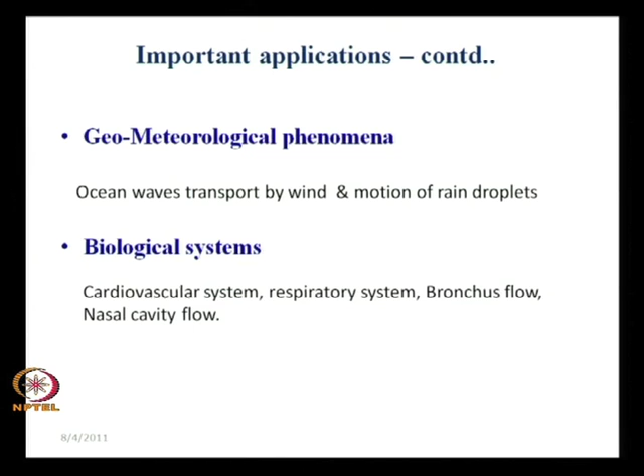But if we have to give a unified approach to this particular type of study, then what we have to do is present some unifying principles. The first thing we have to identify, as I discussed in the last class, is how multiphase flow is different from single phase flow.

Now we found that in single phase flow the situation was either laminar or turbulent. We have to find out whether it is laminar or turbulent, which is already a very well defined technique - once we know it, there is no problem at all. In this particular case also, we have to know the distribution of the two phases.

When you simply pour water from a bottle, through a narrow necked bottle, we find that as the water comes out, large elongated bubbles enter. Definitely the geometry, the topology of these bubbles are different from the spherical bubbles encountered in the previous case. So the same physics, the same governing forces cannot be governing the rise of spherical bubbles - certain forces are more important in one case, certain forces are more important in the other.

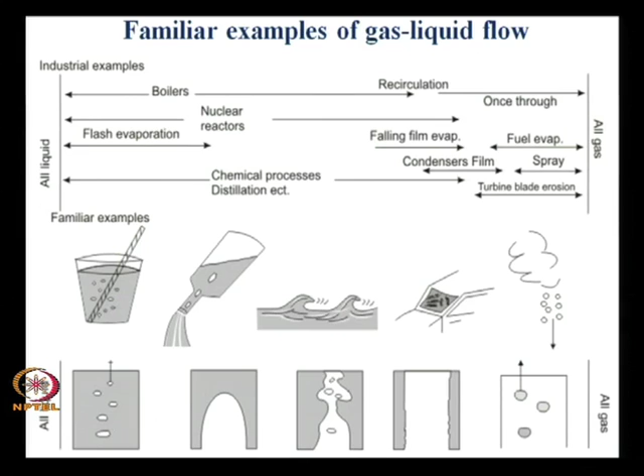So before we go to do anything for multiphase flow - or more specifically, two phase flow situations first, and after that we might touch upon some three phase flow situations as well - the first thing we need to know is the distribution of the two phases. This governs the entire physics of the flow, and more importantly, since the two phases have different densities, as I have already told you...

There is a slip between the phases, as explained in the previous class. The lighter phase tends to slip past the heavier phase, and this slip velocity depends upon the distribution of the two phases, and it varies with a large number of parameters as discussed earlier. Since it governs the slip, it governs heat, mass, and reaction kinetics - it governs everything in two phase flow. The first thing to study is the distribution of the two phases, and how this distribution varies.

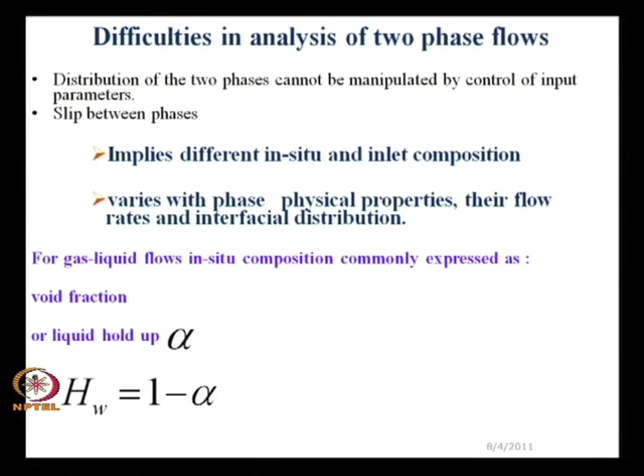Say air and water - what are the different types of flow patterns available? Instead of air, if we use oil, how do the flow patterns change, how do they change with flow rate, and how do they change with conduit orientation and conduit geometry. We will proceed systematically, and today we start the estimation of flow patterns.

From whatever we have discussed, it might appear that there can be innumerable flow patterns with no control over them - we cannot predict them ad hoc, and the situation seems extremely difficult. Well, there are certain fortunate situations due to which some delineation of flow patterns is possible.

The main factors will be, first, the effect of surface tension. If there is a discontinuous phase and its size is small, surface tension tends to keep those small discontinuous phases as sphericals or spheres.

Before I proceed, I would like to clarify one thing - what is a continuous phase and what is a discontinuous phase? A continuous phase is that phase whose different parts can be joined by a curve which does not cross the interface. On the other hand, the discontinuous phase is one where if you want to join two parts, that curved line has to cross the interface.

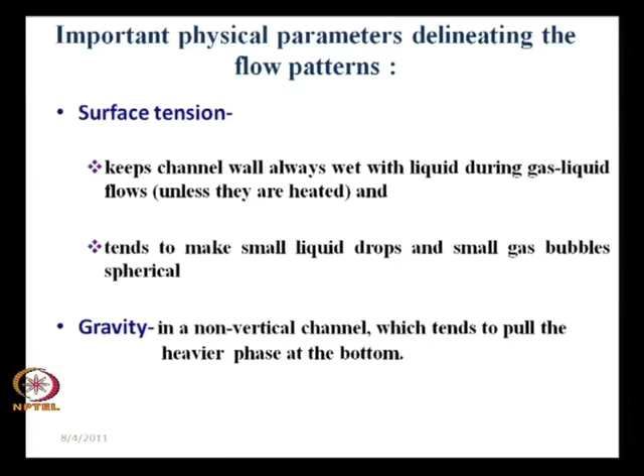So what I would like to do is first take up air-water flows, and see that with gradual increase of one particular flow rate while keeping the other constant, what are the different flow patterns that we observe.

Gradually we will be going to different situations. We will be changing the pipe orientation, the pipe diameter, the fluid type, maybe introducing another fluid inside the pipe, maybe heating the pipe, and we will see what corresponding changes come about in each particular case.

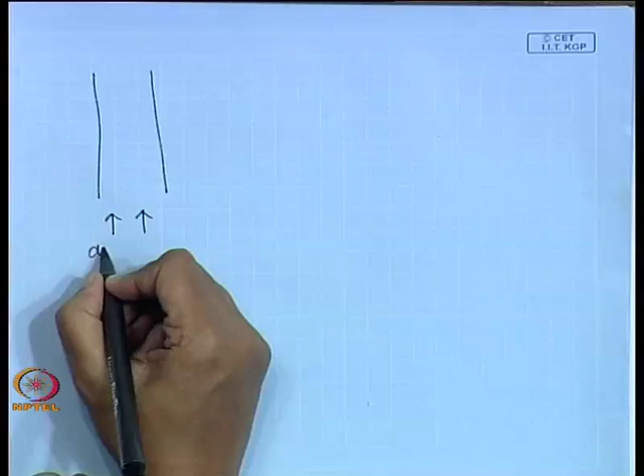Now let us see the vertical case, since gravity will not act the same way under these conditions. For a vertical tube, suppose we introduce air and water, with very low air velocity and low to moderate water velocity.

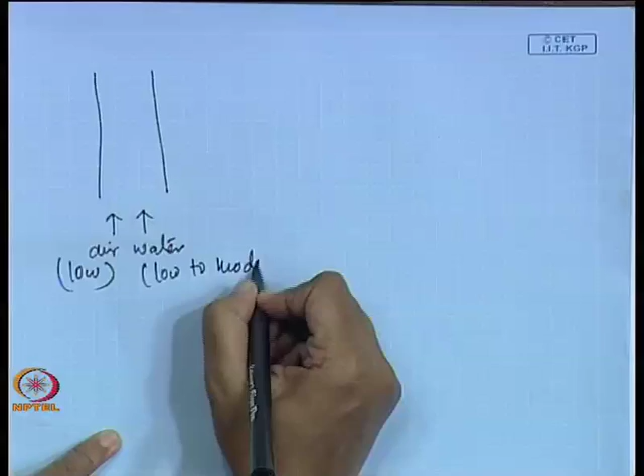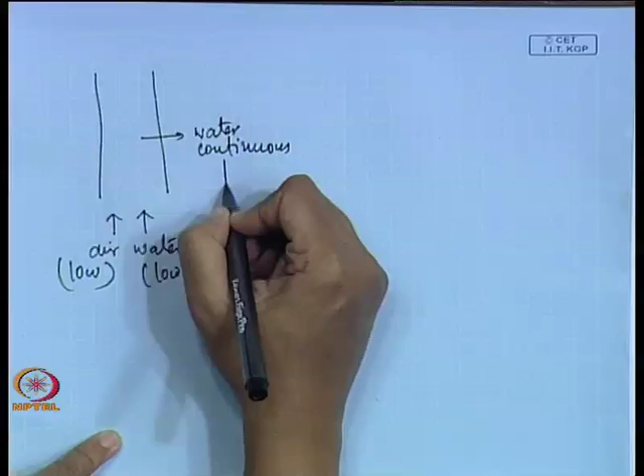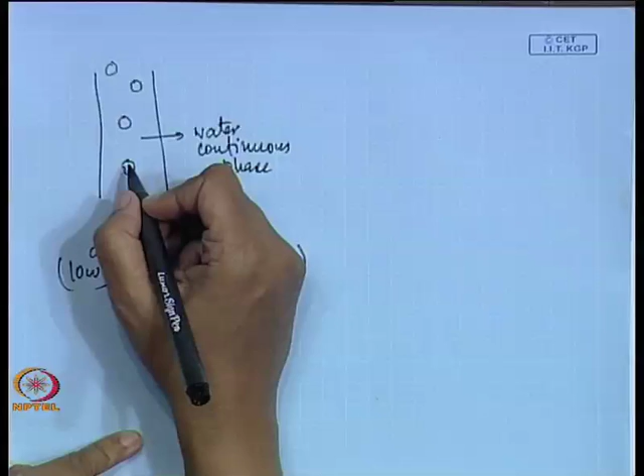What do we expect? We expect water flows as a continuous phase, with discrete air bubbles dispersed in this continuous water medium. If the bubbles are very small, they are definitely spherical. As they grow larger, they tend to become deformed.

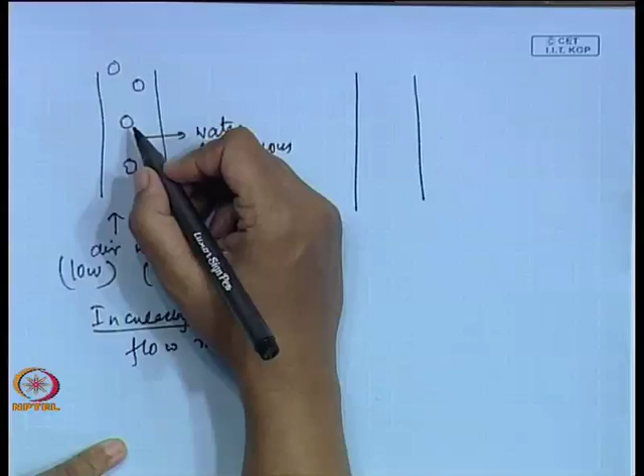Now, with time, we gradually increase the air flow rate, keeping the water flow rate more or less constant. What do we find? Gradually the number as well as the size of these bubbles start increasing, they become much more deformed, deviating more from spherical shape, and gradually some cap-shaped bubbles come into being.

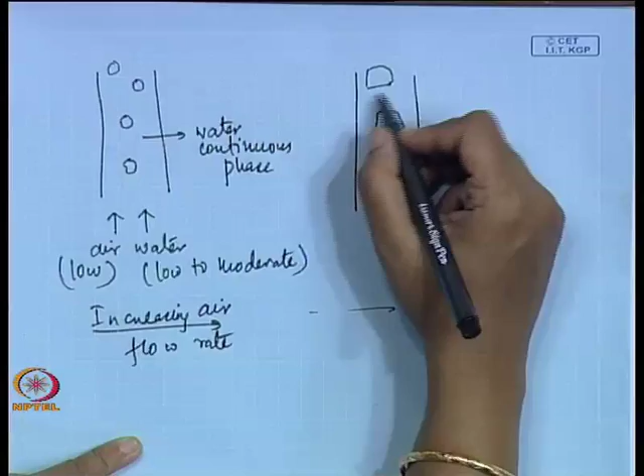Keep on increasing the air flow rate more and more. But in this case also, water is the continuous phase and gas is the discontinuous phase, more or less uniformly dispersed within the continuous water phase. So from here to here, the shape of the bubbles may have changed, but the basic characteristic remains the same.

It is simply water flowing as a continuous phase, and the gas or air phase dispersed uniformly as discrete bubbles in the continuous water phase, where these discrete bubbles may be spherical or non-spherical - oblate, spheroidal, ellipsoidal, cap-shaped, and so on.

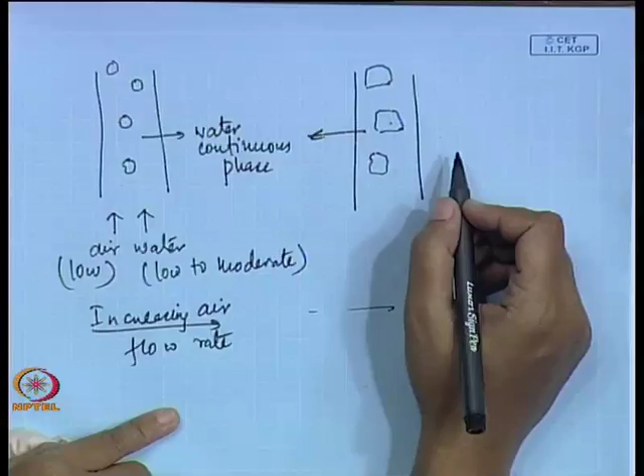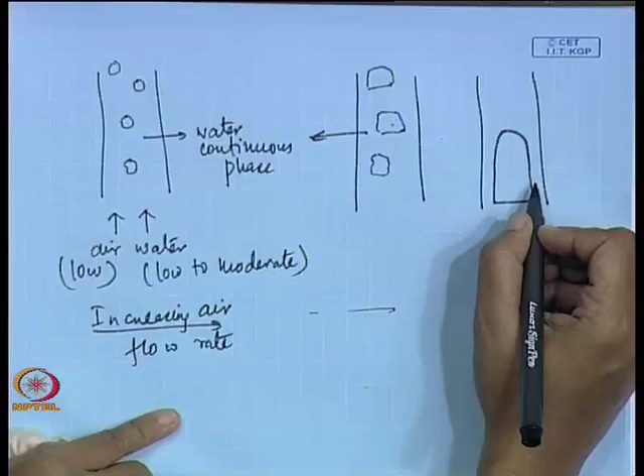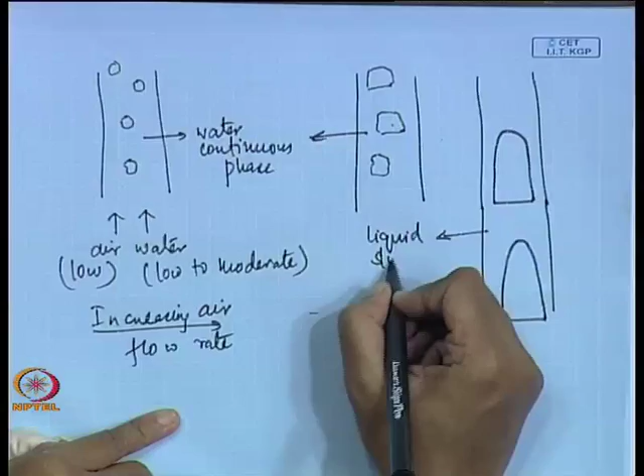As we keep increasing the air flow rate further, these gas bubbles increase in both size and frequency, and finally a situation comes when they gradually coalesce and form elongated bubbles whose size is comparable to the tube diameter. Now the flow pattern is characterized by such elongated bubbles translating uniformly through the liquid phase, with liquid masses in between these bubbles, usually known as liquid slugs.

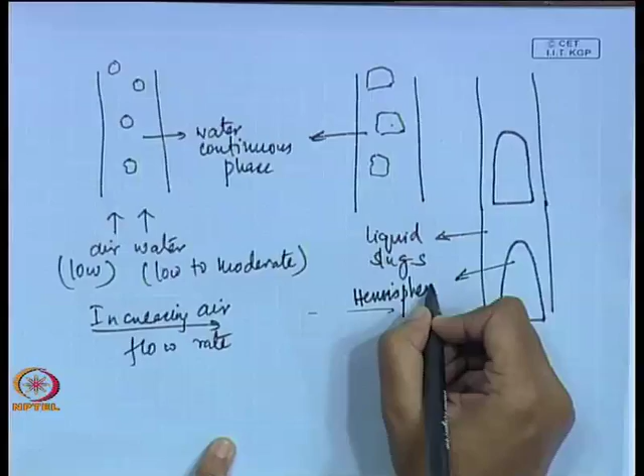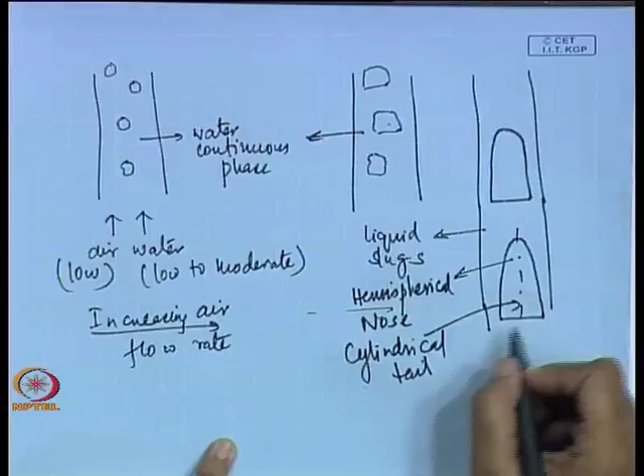Now these bubbles, I have a schematic of these - these elongated large bullet-shaped axisymmetric bubbles. These bubbles are very interesting. What we have observed is that these particular bubbles are characterized by a hemispherical nose and a cylindrical tail. They have two portions and are essentially axisymmetric and bullet shaped.

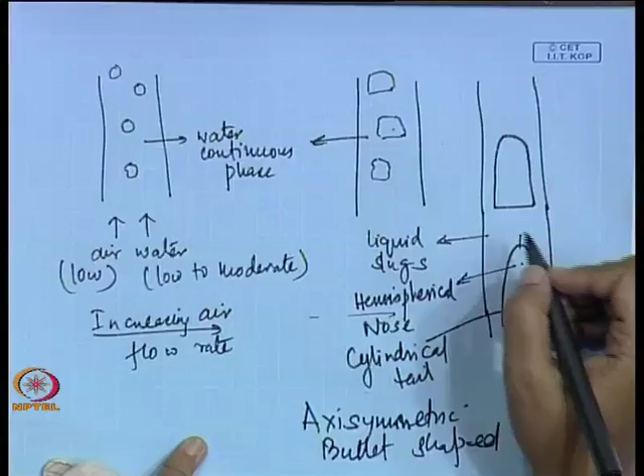Usually this has been observed, and under these circumstances, the liquid from the liquid slug actually flows downward as a liquid film. It is an annular film between the bubble surface and the tube wall.

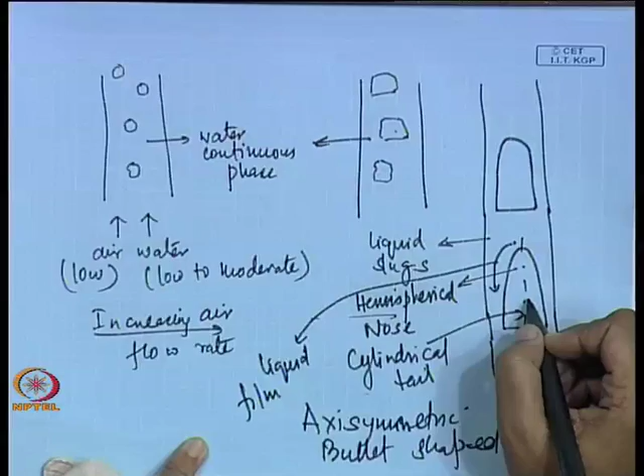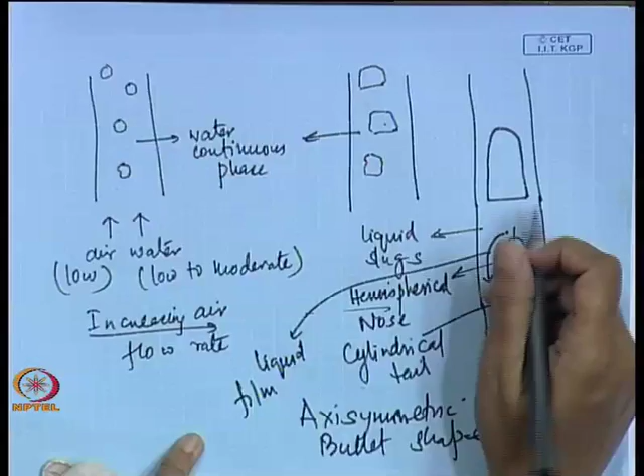So here we find a number of things. First, there are bullet-shaped bubbles which translate periodically through the continuous liquid slug. In this liquid slug there can be bubbles as shown in this figure, or they might not be aerated at all. The liquid slugs may be aerated or they may not be aerated.

The tendency of aeration increases with tube diameter, as I will show from some photographs shortly. What happens is, from the preceding liquid slug, the liquid starts flowing downward as a continuous liquid film along the surface of the bubble, forming an annular continuous wetting film between the tube wall and the bubble surface, and then it comes down and finally meets the liquid slug beneath.

Now, when it meets, a good amount of vorticity is produced. Due to this vorticity, some amount of air is sheared away from the surface of the bubble and tends to aerate the liquid slug beneath. Usually the aeration is more just below the bubble as compared to further downwards.

Remember, once these bubbles are formed, their shape does not change further with more introduction of air. In bubbly flow, both the frequency and the size and shape of the bubbles were changing. But in this case, once the bubbles have formed, their shape does not change. If we introduce more air, the bubbles become longer and longer, but the hemispherical nose and cylindrical tail, the axisymmetric bullet shape, remains unchanged.

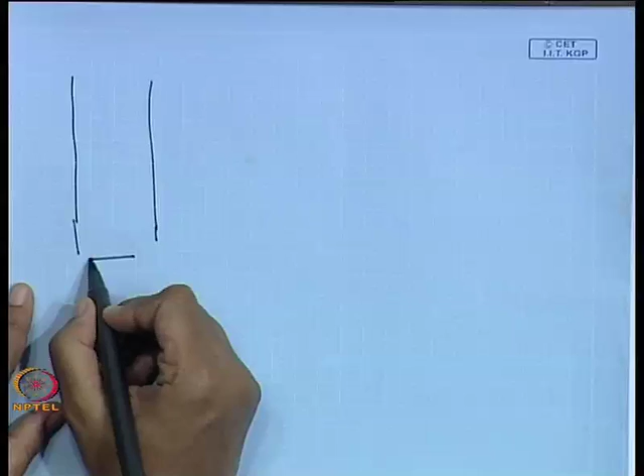Observe any particular cross section and keep noticing it. You find at one point there will be liquid flowing up, or there may be some bubbly flow flowing up. Then at some other interval of time, in the same cross section, you find that air is flowing up and liquid is flowing down as an annular film. Keep observing, and again you find a bubbly flow mixture or pure liquid flowing up, and after some time again only pure air is flowing up and liquid is flowing down as an annular film.

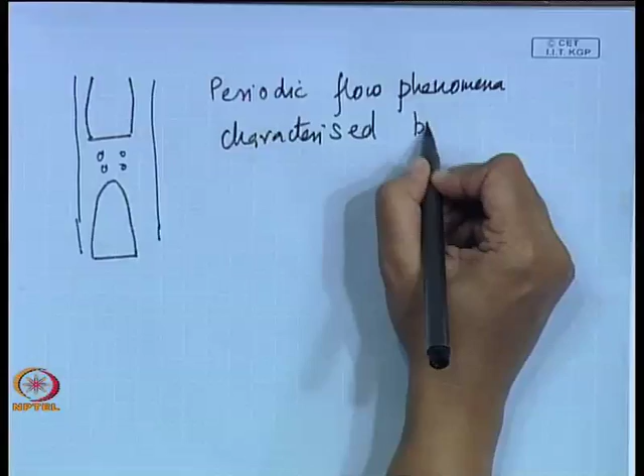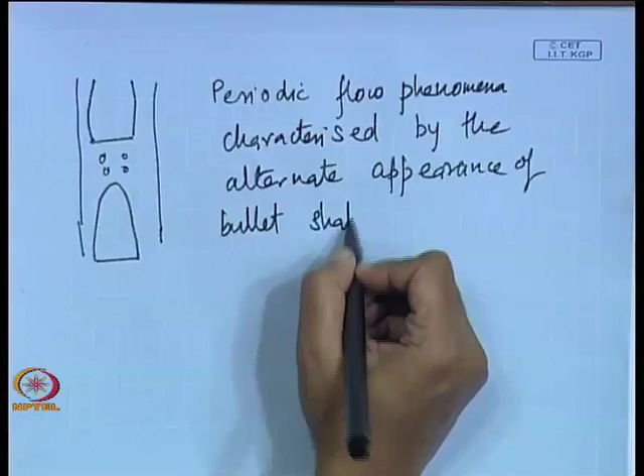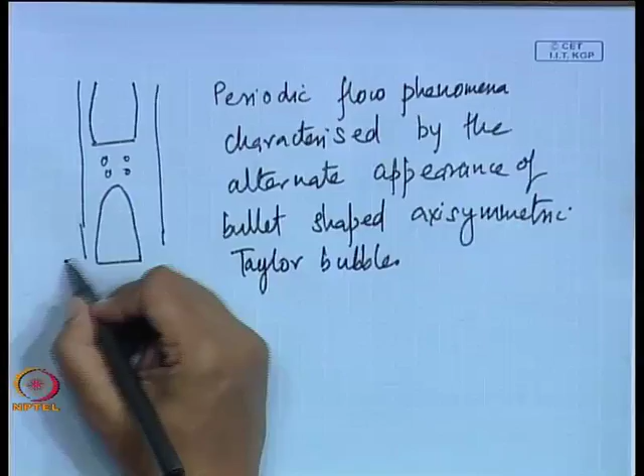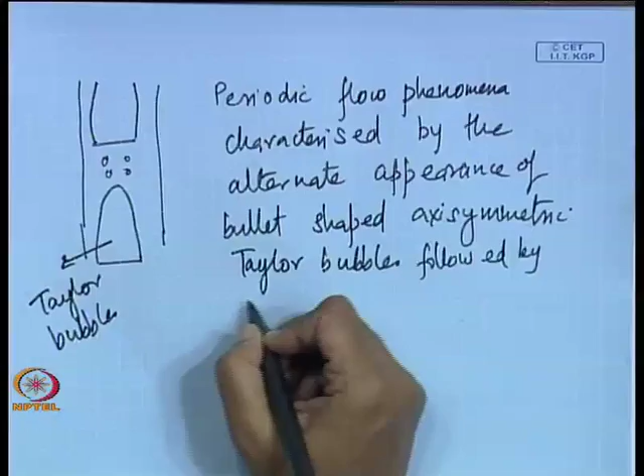So the main characteristic of this slug flow pattern is the periodic or intermittent flow phenomena, characterized by the alternate appearance of bullet shaped, axisymmetric Taylor bubbles. These bubbles were first observed and studied in detail by Davies and Taylor, and from henceforth they have been named Taylor bubbles. Bullet shaped axisymmetric Taylor bubbles followed by aerated or non-aerated liquid slugs.

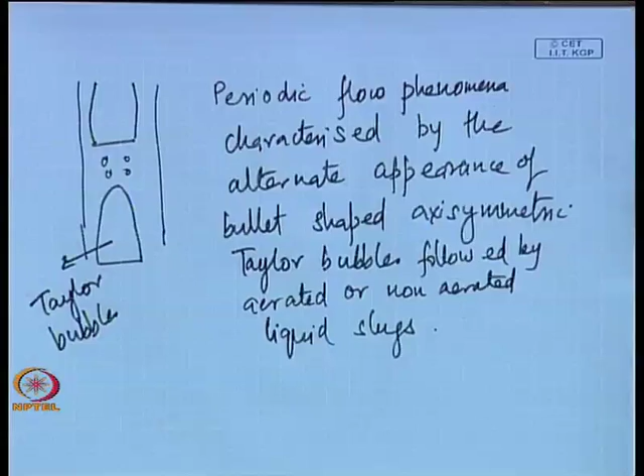So if you compare the bubbly flow and the slug flow, which has evolved from bubbly flow just by increasing air while keeping everything else constant, we find the distribution is widely different. Bubbly flow has a homogeneous appearance; if you observe one particular cross section, you find the same thing, just a bubbly mixture flowing up, liquid as a continuous phase with bubbles distributed. There is no variation with time.

If you keep on increasing the air flow rate, you come to a situation where you get a periodic flow phenomena characterized by alternate appearance of bullet shaped Taylor bubbles and liquid slugs. Now keep increasing the flow rate further. These bubbles become larger and larger. As they become larger, they become unstable, and finally a situation arises when these bubbles get sheared and broken up, oscillating up and down in the flow passage, presenting a totally chaotic and random flow distribution, termed the churn flow pattern.

So that very nice periodic flow phenomena disappears altogether, and we get a totally chaotic and random flow phenomena, where there are irregular chunks of gases and irregular masses of liquids flowing up and down in a totally chaotic and random manner. You cannot predict the distribution; it is simply chaotic and random, and that is termed the churn flow pattern. Keep on increasing the air flow rate more and more.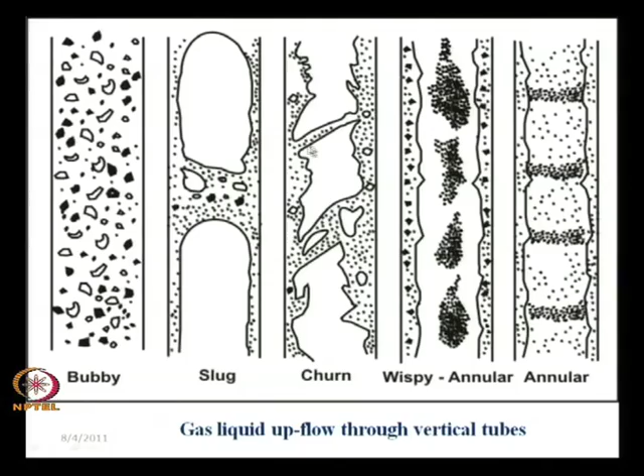Next we come to the churn flow pattern, which is the least understood, least studied flow pattern - there is plenty of scope to study it. It is a totally random, chaotic, erratic mixture of two-phase flow, not very well understood. After that we get the annular flow pattern again, which is a very well ordered structure with a gas core and a liquid film.

So these are usually the 4 types of flow patterns encountered in a vertical tube for unheated conditions. Now, keeping everything else constant, instead of a vertical tube, we make it horizontal. What changes would you expect? Immediately you would find that gravity acts differently on the tube - the lighter fluid, the air phase, will be on top and the water phase on the bottom. So something not observed in the vertical case will be observed here: stratification.

So if we make the pipe horizontal, what we observe is an immediate tendency of stratification. At low flow rates of the two phases we find stratified flow, and then gradually as we increase the liquid flow rate or the gas flow rate, waviness sets in and we come across wavy stratified flow. As we keep increasing the velocity, we find these waves become larger and larger, until a time comes when the amplitude of the wave becomes so large that it can actually touch the upper wall.

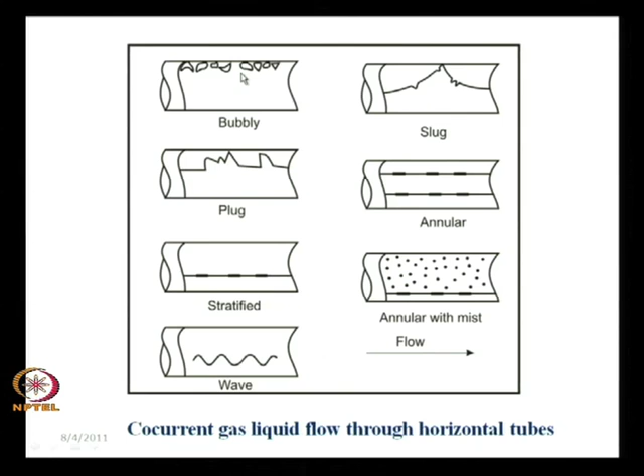And with gradual increasing of the liquid flow rate, we find that the effect of gravity decreases and more or less there is a uniform distribution. So, the moment we make the tube horizontal, without doing anything else, stratification sets in. So we get one additional flow pattern, the stratified flow. It is usually differentiated into two types: the smooth stratified flow and the wavy stratified flow. Just because of the difference in wave characteristics, some different treatment is necessary for the two, and therefore we distinguish between them.

The other flow patterns are more or less the same as we observed in vertical tubes, the only difference being that all the flow patterns have a tendency of asymmetry, which reduces with increasing phase flow rates. And interestingly, it also reduces with decreasing the tube diameter. Under that condition too, gravity does not play much role.

Well, the next thing I would like to deal with is, suppose we deal with a heated tube. Same vertical tube is standing, now we start heating it with a constant heat flux at the walls. Now here, certain additional factors start to come in. What are the additional factors? First, as this tube is heated, what happens?

Initially we have introduced liquid at below saturation temperature, so the liquid starts getting heated. As it heats up, a point comes when vaporization starts to occur. Then gradually vapor bubbles are formed at certain preferential sites, and they start getting detached and flow upward in the liquid phase, forming the bubbly flow pattern. Gradually the rate of vapor generation increases, and these vapor bubbles become larger, start coalescing, and form Taylor bubble like structures, giving rise to the slug flow pattern.

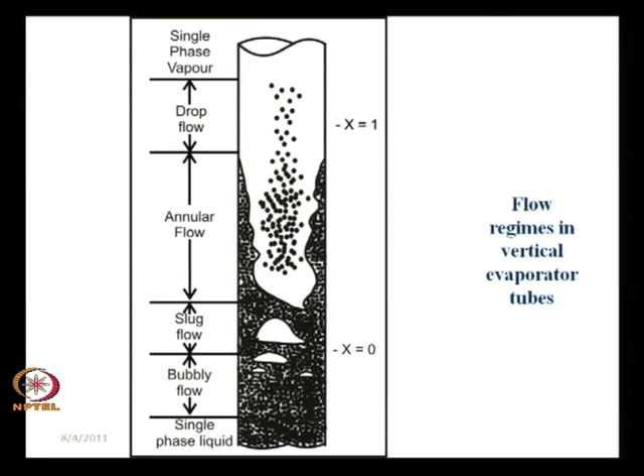In this situation, we find that gravity also starts to play a part, in addition to the factors already mentioned for vertical heated tubes. That means the presence of an asymmetric temperature profile, and then the other factors: continuous change in phase fraction along the axial length, departure from thermodynamic equilibrium, departure from local hydrodynamic equilibrium, and presence of radial temperature profile. In addition, gravity also sets in, and therefore adds to the asymmetry of the flow situation.

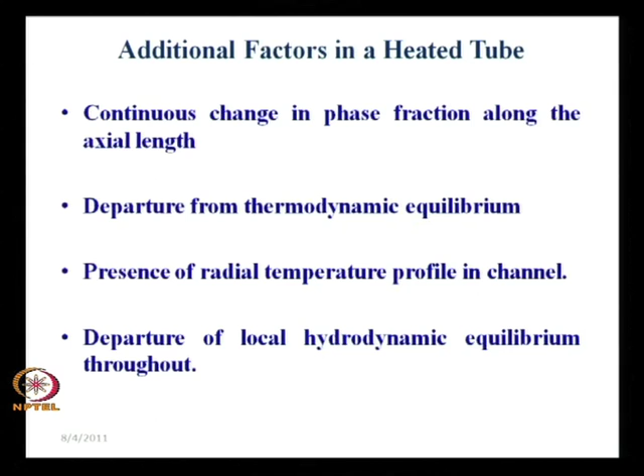This flow situation, if you imagine, will be something of this sort. Again, we start with liquid where T is less than T saturated.

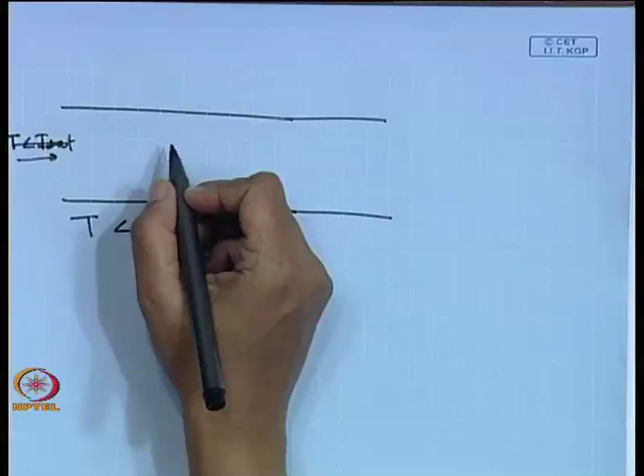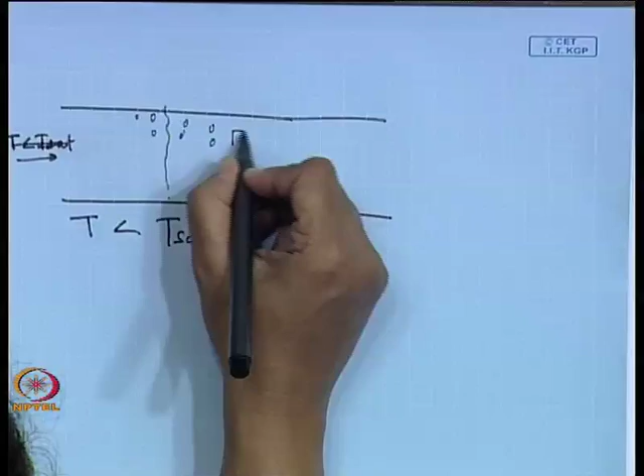We start with pure liquid till a particular portion, and then gradually the vapor bubbles start to come, they gradually detach from the wall, and then start flowing, and gradually become more and more elongated, just like slug flow sets in. Then, due to asymmetry, there will always be a tendency of the vapor phase to be on the upper portion and the liquid phase to be on the lower portion.

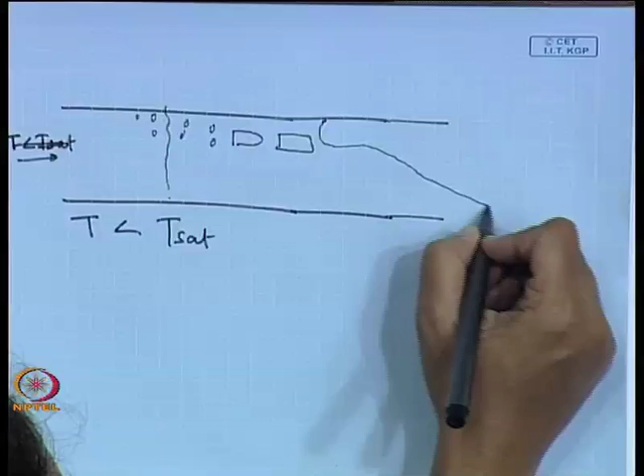So in the annular flow pattern, there is a continuous tendency of drying out and re-wetting. There is a continuous tendency of liquid to get dried out completely, but since there is a tendency of liquid to wet the wall, it again re-wets and dries out, again re-wets. So such a situation arises.

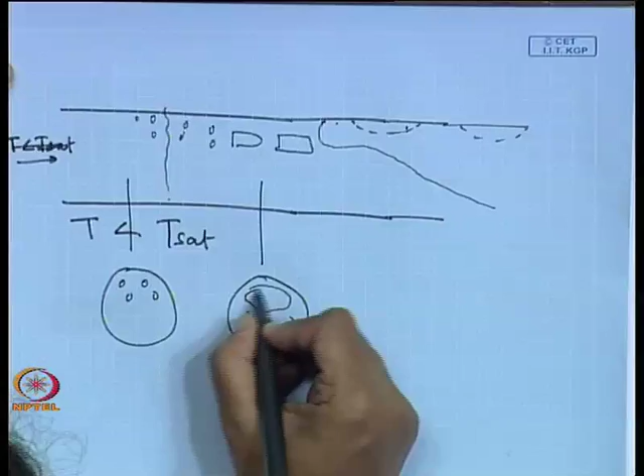If we take up the cross sectional views of these cases, here the cross sectional view will be something of this sort. Then gradually, as we keep observing the cross sectional views, it will be something of this sort. Then again, if we take a cross sectional view, the bubble will be larger and there will be smaller such bubbles.

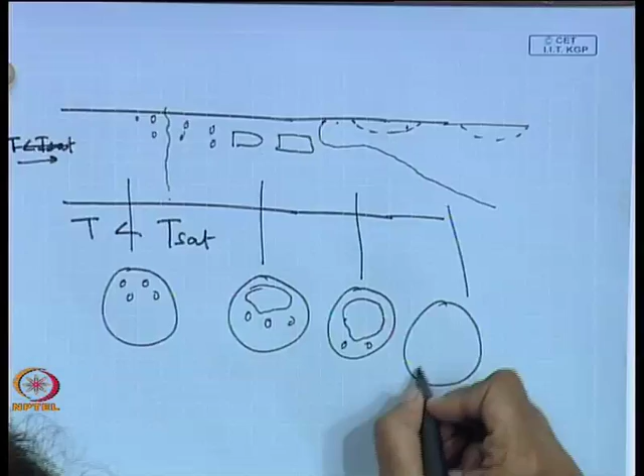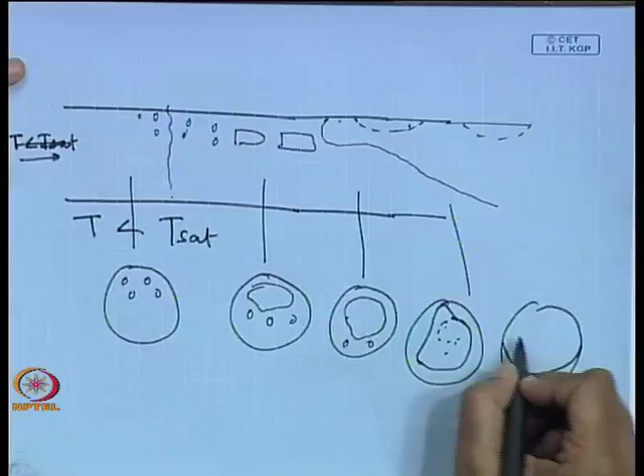We take another cross sectional view, we find a thicker liquid here and a thinner liquid here, and things like that. Then there will be portions when only the lower portion will be wetted and the upper portion will be dried out, in this particular portion if we observe. So this constant intermittent drying out and re-wetting is something very unique.

And finally, after that, just like the vertical heated tube, here we have quality equals to 1, here we have x equal to 0, and here we have only vapor flow.

So, therefore, we find that in a horizontal heated tube, since gravity also sets in addition to the situations which we had observed in the case of vertical tube, there is a possibility of intermittent drying and rewetting of the upper surface of the tube in wavy or annular flow. Gradually, this intermittent drying period becomes longer and longer.

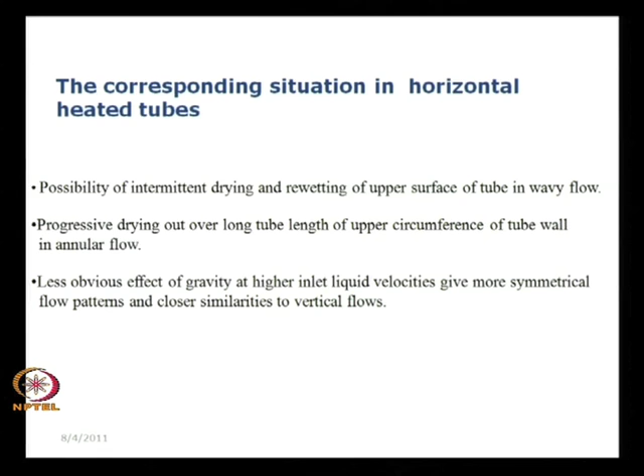So it is progressive drying out over long tube length of the upper circumference of the tube wall in annular flow. Naturally, as you keep increasing the liquid flow rate, there is less obvious effect of gravity, and the flow patterns become more symmetrical, closer to vertical flows. This was for low to moderate liquid flow rates. As we go to higher flow rates, the situation becomes more similar to what we observed in vertical flows.

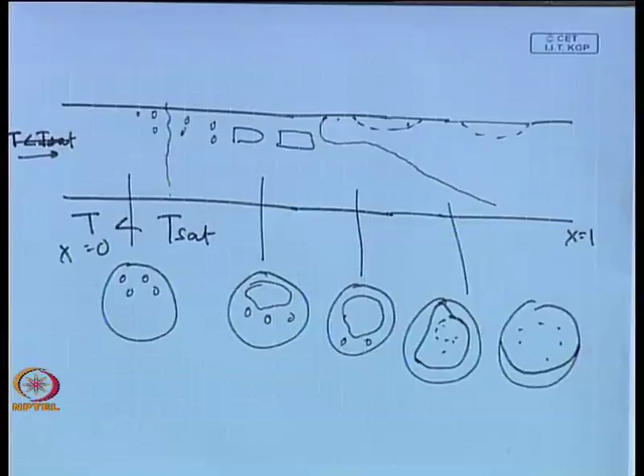So in this way, we find: when we take a tube, what are the flow patterns? When we make the same tube horizontal, what are the flow patterns? Keeping it vertical and heating it, what are the flow patterns? Making it horizontal and heating it, what are the flow patterns? These things we can understand from this situation.

Now let me take up another situation which can be encountered for condensation. In condensation also, the flow pattern will initially be annular, and then gradually just the reverse of what you have seen. There, we had started with bubbly, slug, annular. Here we start with annular, mist, annular, then some sort of stratification, then slug, and things like that.

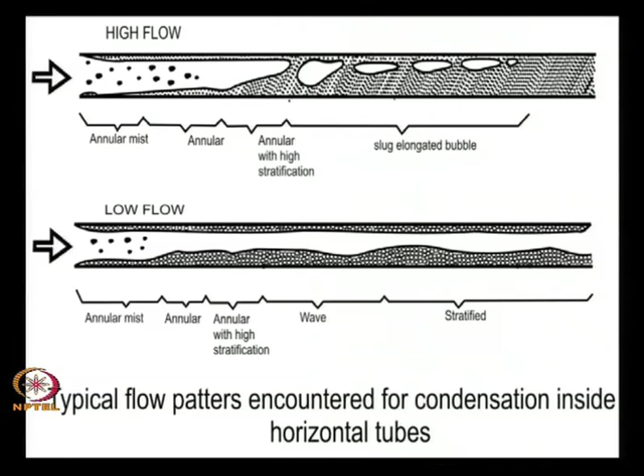Remember, the range of existence of the different patterns—how long it will be bubbly, how long it will be slug, how long it will be annular—depends upon the entry condition, the hydrodynamic condition, and things like that. If the situation is such that the bubble generation rate is very high at the walls, then probably we will not get a bubbly flow pattern at all during evaporation—we will go straight away to the slug flow pattern. Such a situation can also arise. So which flow patterns occur and what will be their range of occurrence depends upon the inlet conditions, the other hydrodynamic conditions, and so on.

Now let us see: instead of air, if we simply introduce another liquid—so instead of air-water flow we have kerosene-water flow, or toluene-water flow. Kerosene-water flow will be more akin to oil industries, toluene-water will be more akin to mass transfer operations sort of thing.

Now in this case, what do we think should happen? Do not look at the figure for the time being, just try to understand the physics. There we had one particular situation—what was it? That the liquid will always wet the pipe wall. Here both are liquids, both can wet the pipe wall, isn't it? So therefore, as we had only bubbly flow there, here we can have oil-in-water dispersed flow as well as water-in-oil dispersed flow, depending upon the flow conditions.

High oil, low water velocities give us water-in-oil dispersed flows. Low oil, high water gives us oil-in-water dispersed flows. Now this is a very interesting situation. Dispersed flows are needed in a variety of cases. If we are dealing with liquid cases, be it a reactor or absorber or whatever, we find that when we have oil-in-water flows, we start with low water, high oil flow rate.

Then, keeping the total mixture velocity constant, we keep on increasing the water velocity and decreasing the oil velocity, so that the total mixture flow rate is constant. We can do it. For example, we start with U-oil of say 0.1 meters per second, and U-water of say 0.5 meters per second, so that the mixture velocity is 0.6 meters per second.

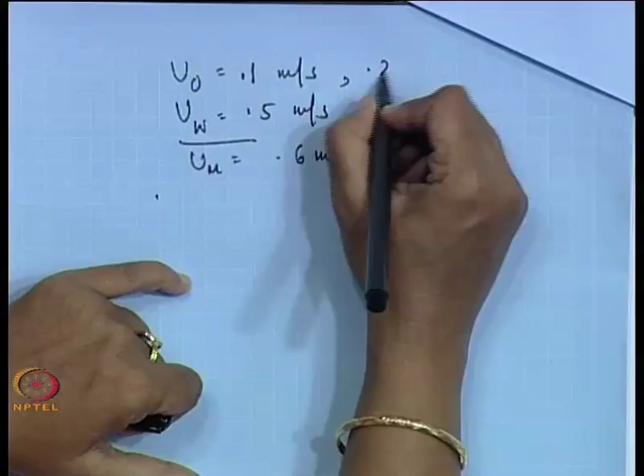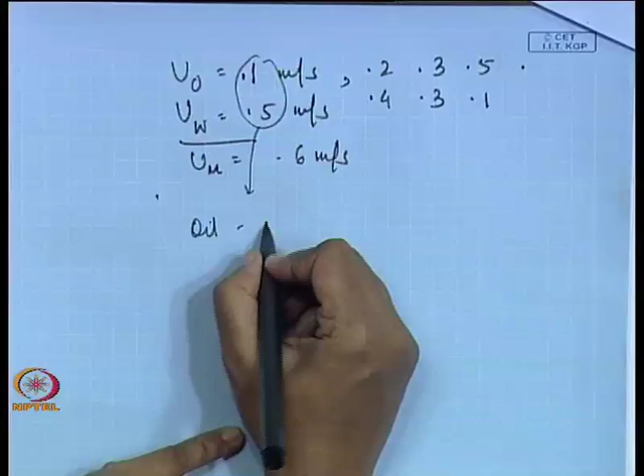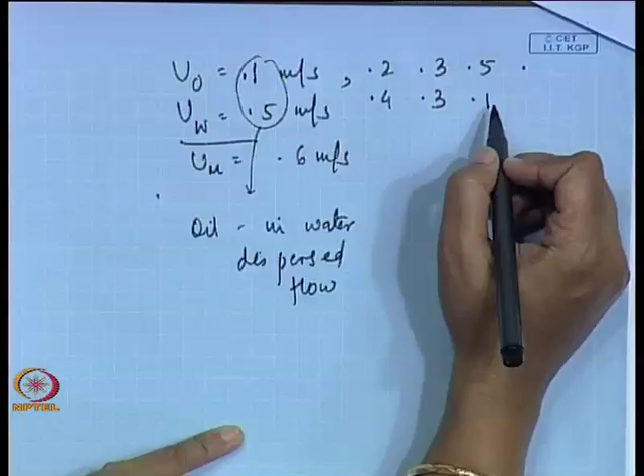Then we take another flow rate: this is 0.2, this is 0.4; this is 0.3, this is 0.3. In this way we keep on going—this is say 0.5, this is 0.1—and finally we reach this particular flow pattern. Under these circumstances, we have oil-in-water dispersed flow, and gradually, as we keep changing the flow proportions of the two while keeping the mixture velocity constant, we finally reach a condition where we have water-in-oil dispersed flow.

We frequently call one of them dispersed, the other inverted dispersed. Some researchers prefer to call it oil in water, water in oil. So different nomenclatures are in use, and the transition from oil in water dispersed flow to water in oil dispersed flow is very important, because the total hydrodynamics changes - the total interfacial surface area changes if water is dispersed in oil versus oil dispersed in water.

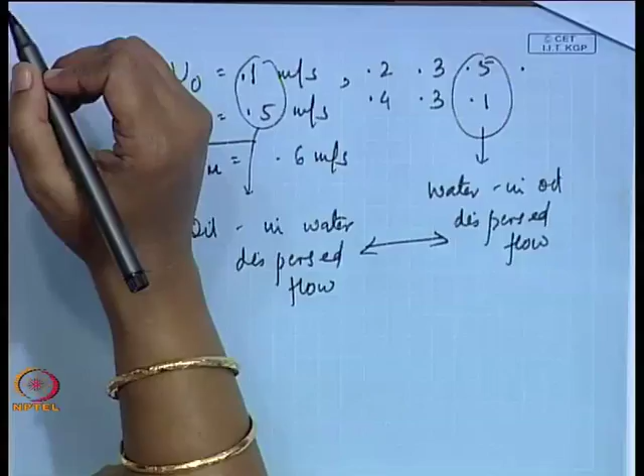Suppose we have an organic phase and an aqueous phase, and a particular reaction or mass transfer is controlled by the organic phase. Say it is toluene with acetic acid dissolved in it, and we have a water phase. Acetic acid is more soluble in water, so it readily shifts from the toluene phase to the water phase. In this case, we get better mass transfer if toluene is dispersed as droplets in a continuous water phase.

So we would like to ensure toluene in water dispersed phase, and we would always like to see under what conditions it tends to become water in toluene dispersed phase, under which we do not expect a drastic increase in mass transfer. There are several situations where we want to ensure one type of dispersion, or predict the transition from one dispersion to the other.

Now remember, during this transition, what happens? Suppose we have kerosene or toluene dispersed in water. Gradually, as we keep increasing one flow rate and decreasing the other, the toluene droplets start becoming larger and larger, and the water phase starts breaking down into smaller and smaller droplets. There is continuous creation and recreation of surfaces - large amounts of interfacial surface are created and recreated, and a lot of chaos forms. This transition is known as phase inversion.

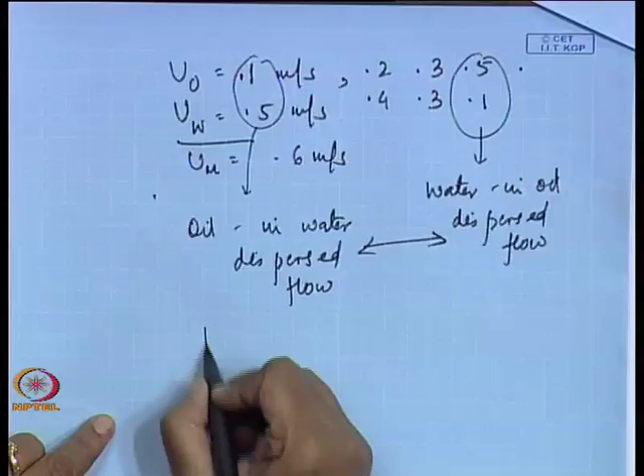For liquid cases, this word is very important - you are supposed to remember it. Phase inversion is the phenomena during which one particular dispersion inverts to form another type of dispersion. This is very important, and is usually characterized by a sudden increase in the pressure drop.

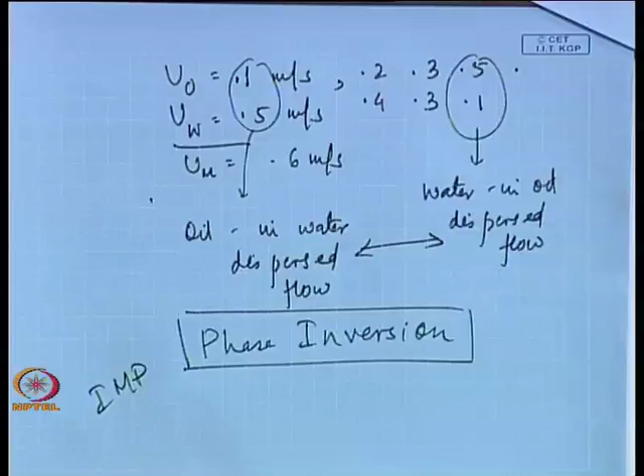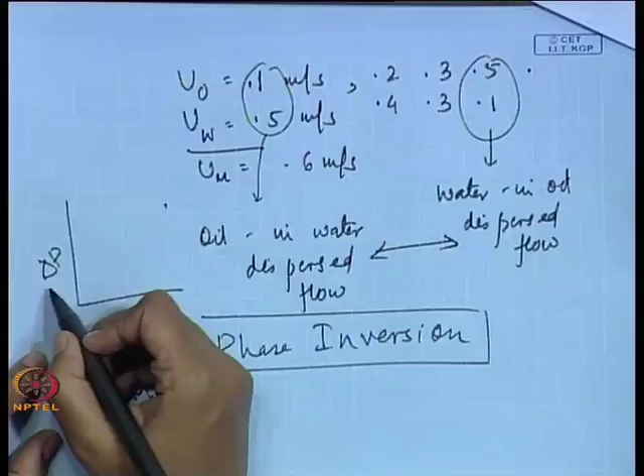If you take a pressure drop reading, you find it gradually increases, and the moment you approach phase inversion, there is a drastic increase in pressure drop, and again as you enter another dispersion, the pressure drop decreases gradually. So if you plot delta P or delta P by L versus U mixture, the pressure drop gradually increases, then at phase inversion there is a steep increase, and again a gradual increase.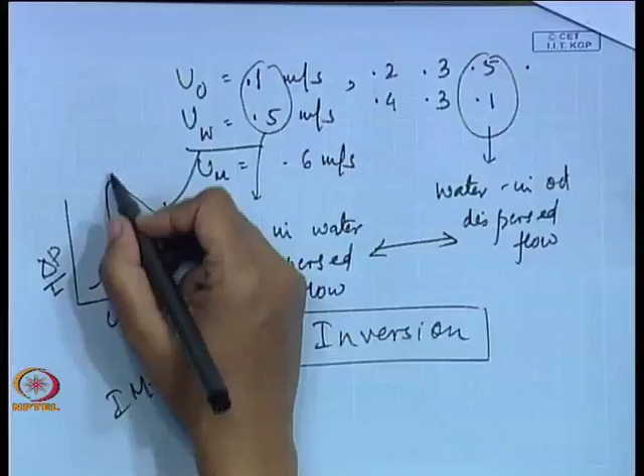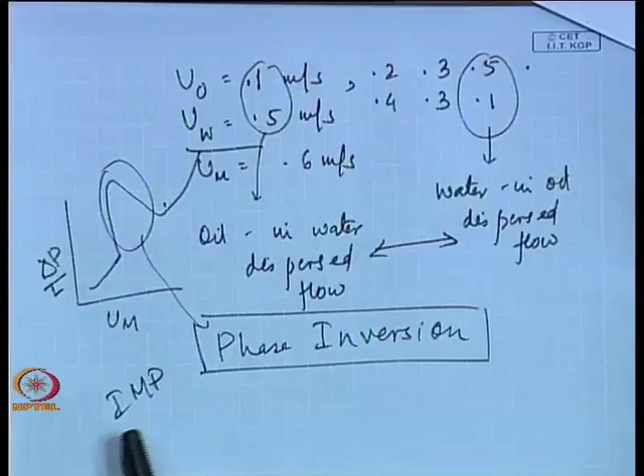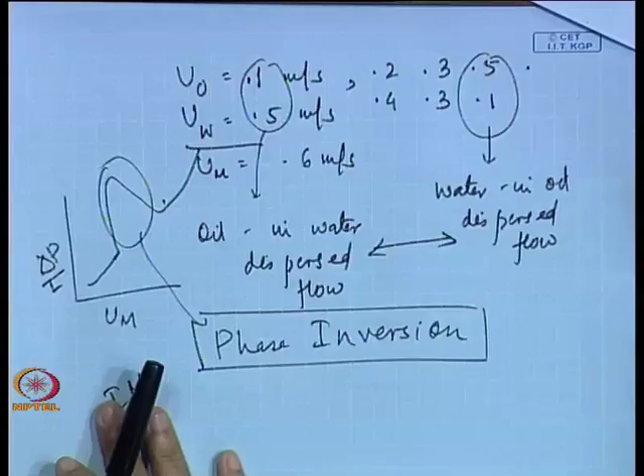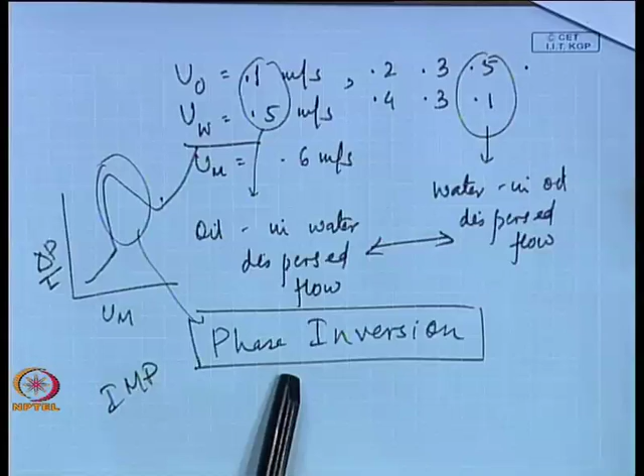This portion marks the phase inversion point. It is very important to identify this condition, just like the flooding point, because it is marked by a very high increase in pressure drop. Under these circumstances, as observed in laboratory studies, several transfer operations are highly enhanced. This is something very special for liquid flows - you do not have it for vapor liquid or gas liquid cases. There is one other very important phenomena for liquid flows which we shall discuss in the next class.

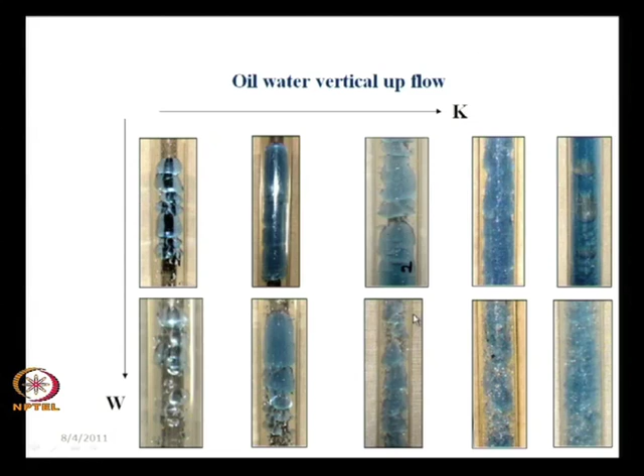There are certain other interesting factors for liquid cases which we will take up tomorrow, and then we will go to some other interesting and unique features of flow patterns for different geometries and flow conditions, and so on. Tomorrow we will be continuing this lecture and studying more about flow patterns. Thank you very much.